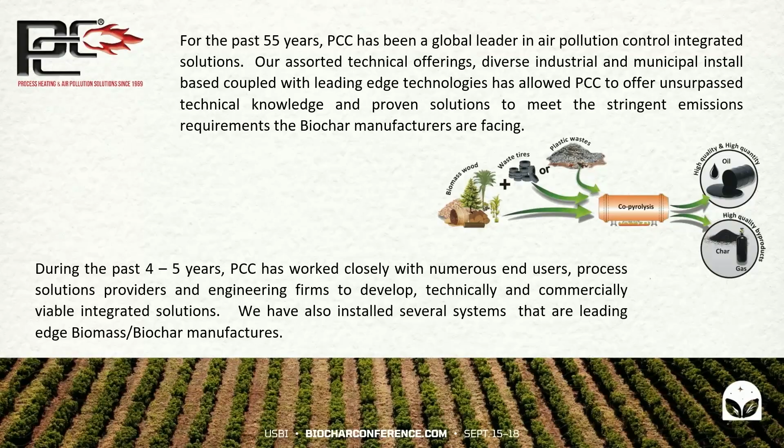From an equipment standpoint, when you look at the technologies PCC is able to offer, we can offer direct-fired thermal oxidizers and combustors, so we're generating heat sources while combusting those pollutants. We have recuperative thermal oxidizers, regenerative thermal oxidizers, and all types of scrubber technology, wet and dry, to treat acid gas formation or other compounds that may be within the waste gas or gas evolved from that pyrolysis process.

Particulate control, as you're going to see in this presentation, particulate is the number one compound that needs to be treated throughout the entire biochar manufacturing process. So we can look at bag houses, venturis, and if we get into submicron, very fine particulate, we would look at wet electrostatic precipitators.

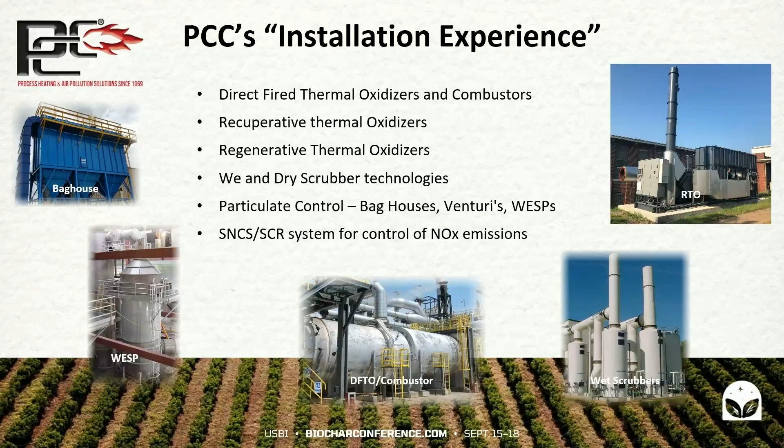The other thing we really see today, very dominant throughout all industry, you can look at VOCs, volatile organic compounds, those carbon-based compounds emitted from various productions. But NOx, nitrous oxide, is really at almost a higher level from a control standpoint these days. The limits keep going down, the allowable emissions continue to decrease, and depending on where you are in the country it can be very significant. So we need to look at NOx, and the alternative technologies available to reduce those post-combustion NOx emissions. We'll be talking a little bit about that as well.

So we all know, you're here participating in this conference, we know the benefits of biochar, the basic reactions and the basic technology behind pyrolysis. But I'm not sure everybody is fully aware of what happens during that pyrolysis process at high temperatures, low oxygen content. Depending on the feedstock materials, you're going to generate various volatile organic compounds, VOCs, NOx, CO, CO2. There's all kinds of things coming out of that process.

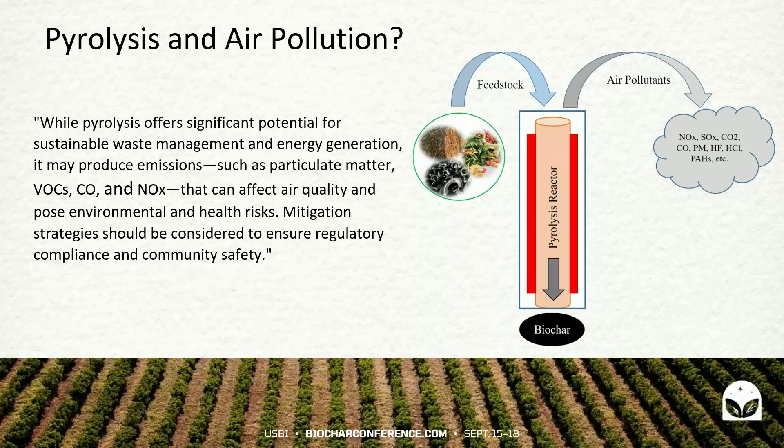And it's our job to treat those compounds so that you are in compliance and so that we're not polluting the air. It's one thing to take a waste product and generate something very valuable, that has a tremendous amount of value to the market, the agricultural market, and various industries for a multitude of applications, but we can't pollute the environment. The biochar industry is just like any other industry: at certain levels, certain emission rates, you're going to have to put controls in place.

Depending on the feedstock will determine basically what type of emissions and the volume of emissions you're going to be generating, and we'll go through that in more detail. The key message is that throughout the process, you're emitting different things, from particulate matter to VOCs. In certain cases, you'll be generating NOx, CO, CO2. So there are waste products that need to be dealt with. Once again, this is all predicated on where you are from a manufacturing standpoint, and what tons per year you're emitting.

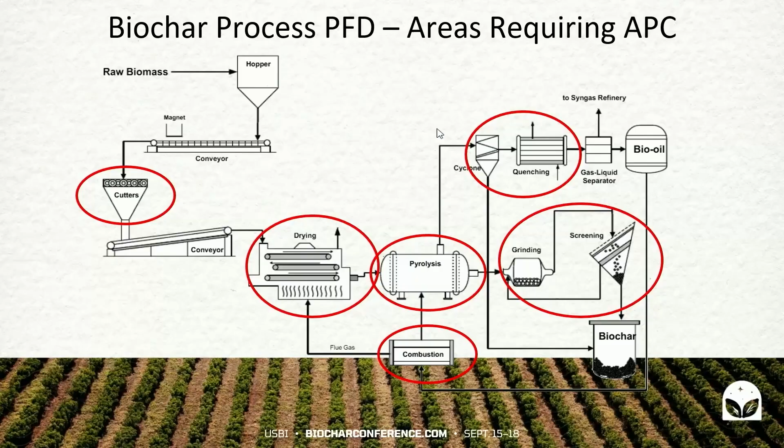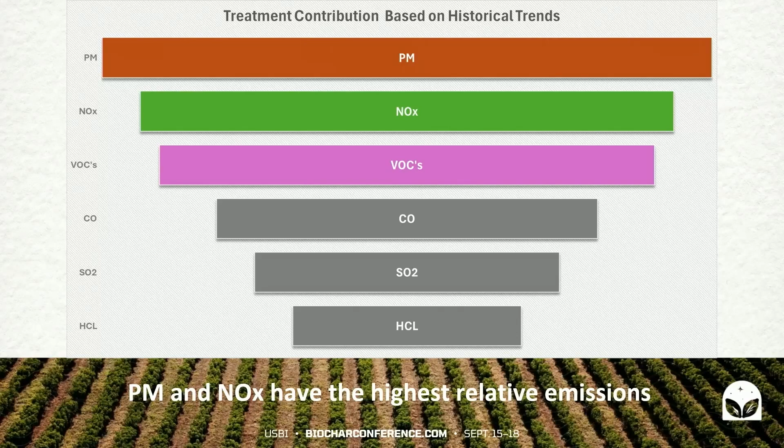Then we get into your VOCs - all the other types of compounds being emitted during the pyrolysis process. CO, SO2, and in some cases we're going to have acid gas formation, and it can vary. Hydrochloric is very common, depending on what compounds make up that biomass or the product going into the system. You could create some acid gas, and those have to be treated. You can't emit hydrochloric acid to the atmosphere - you need to treat that.

So when we look at an overview of the major emissions, we talked about particulate matter. Well, particulate matter can come in all sizes. There are a lot of new regulations out there taking it down to PM 2.5, the very fine particulate, even submicron particulate. And the destruction efficiencies are extremely high, so the requirements are very high. You have to look at that.

And particulate matter can create respiratory problems for people. You can see it in the air, you can see smoke. Smoke typically has a lot of particulate in it.

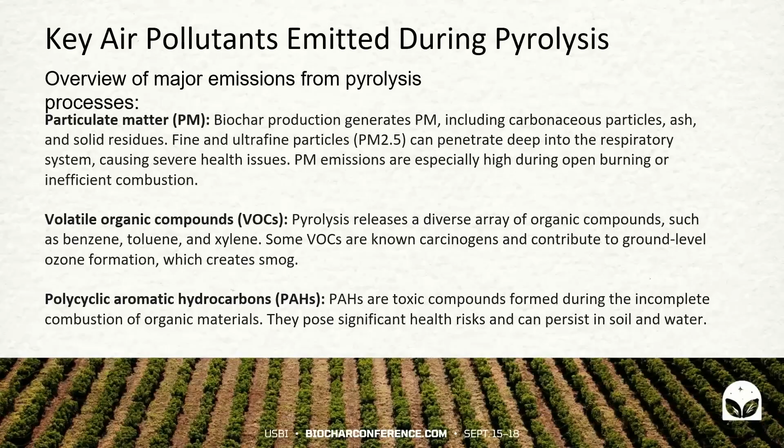Volatile organic compounds - there's all types of compounds that will be released during the pyrolysis process. You can have compounds such as benzenes, toluenes, xylenes, a lot of different carbon-bearing products. There's also PAHs, carbon monoxide, and NOx, which is critical. And then we've got the HAPs compounds we have to deal with.

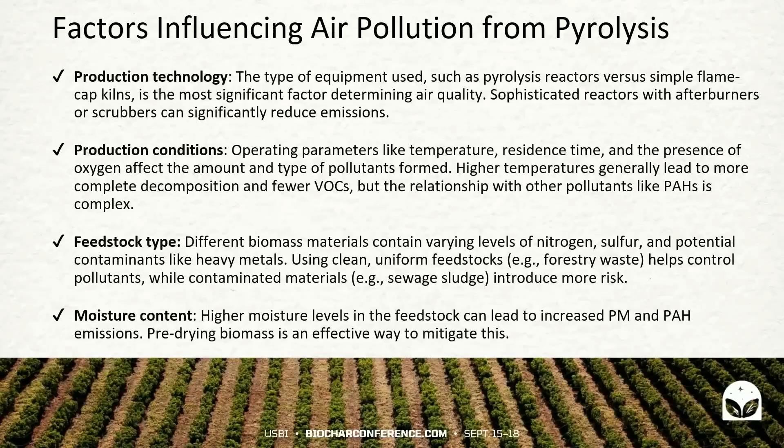So how do we influence this? We can look at the type of equipment being used for the pyrolysis process, the production conditions - temperature, length of time, oxygen content - and the feedstock type, which is very critical. What type of feedstock are we using for this? Moisture content within the process - we need to look very closely at that as well.

Feedstocks - all types of feedstocks. You guys, I don't need to tell you what they are.

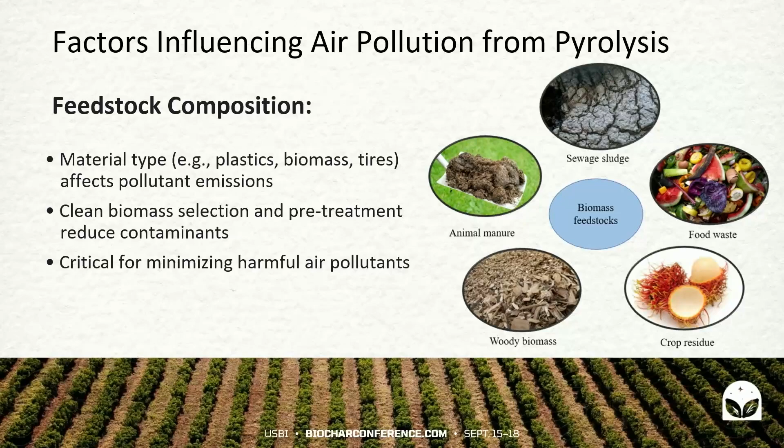You're all aware of it. There are certain feedstocks that produce less VOCs than others. Typically, when you get into biomass and agricultural byproducts, those are very low emitters for the most part. They all emit, but very low. When you get into plastics or municipal waste, you're going to have all kinds of compounds coming out of those. Municipal waste is probably the worst because you have no idea what's in there, and it varies from municipality to municipality.

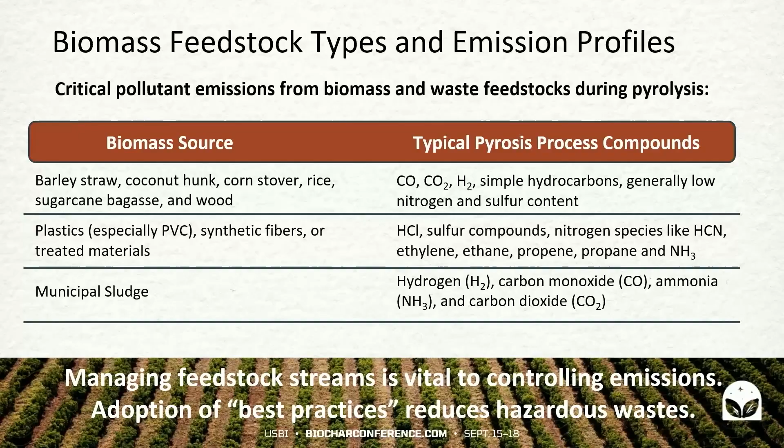So if we look at different feed sources, more or less that biomass, your barley, your straw, agricultural byproducts, you can see what's emitted. Various compounds are there, but when you get into your plastics and municipal sludge, suddenly you're dealing with higher concentrations. You have the potential to create acid gas, and you also create a lot of NOx. This adds to your control requirements.

Typically, if we're dealing with particulate matter, we're going to institute baghouses, cyclones, venturis, or if we're into submicron, we're going to go with WESPs. You could have a combination thereof in some cases. For controlling diverse pollutants, we can do dry sorbent scrubbers, wet scrubbers, carbon injection systems, and control ammonia slips—so there's a lot of different things we can look at.

NOx emissions, once again, are critical, and really it comes down to how effective you run your process from a control standpoint, and what you're doing in your process to minimize that. Temperature is a big thing—the higher you go in temperature, the more NOx you will generate if you have nitrogen-bearing compounds, so we need to look very closely at that.

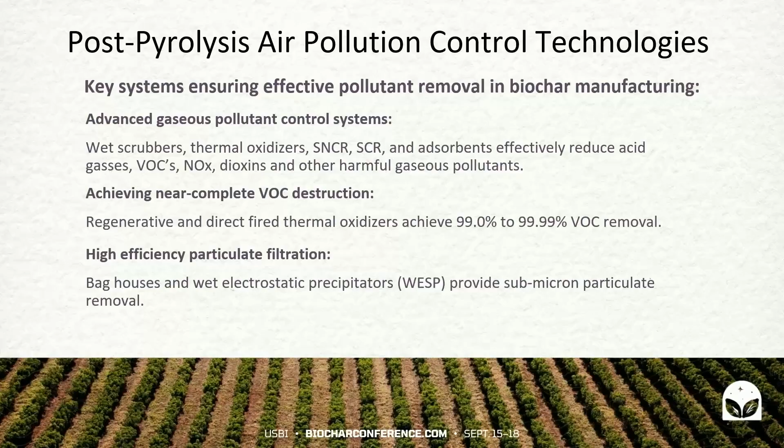When you get into advanced gaseous pollutants and typical VOCs, you start to look at wet scrubber technologies, more advanced thermal oxidizers. At the end of the day, the combustion technology, in the simplest of terms, is a flame in a can that operates at a given temperature for a given amount of time, typically in the 1 second range at 1650, 1700, 1800 degrees F, yielding very, very high destruction efficiencies. And then for very small submicron particulate, we look at wet electrostatic precipitator systems.

VOCs—we can achieve 99 to 99.99% destruction via combustion technologies. There are various technologies and configurations out there, but you can achieve very high destruction. Carbon monoxide, we can get down to the 50 part per million range. Sulfur compounds, 98 to 99% destruction. Nitrogen oxides, or NOx, we can get down to 80 to 95% removal.

Two methods: if we use an SNCR, a selective non-catalytic reduction, we can achieve about 60% reduction. If we use the SCR, the selective catalytic reduction, we can take that down to the 95% range. And then when you look at other pollutants, down the list, we can achieve very, very high destruction efficiencies. So as I indicated before, we're really able to provide the technology to meet the emission requirements pretty much wherever you are. And like I said, we're very successful—we've got two installations in California that are meeting all the NOx requirements.

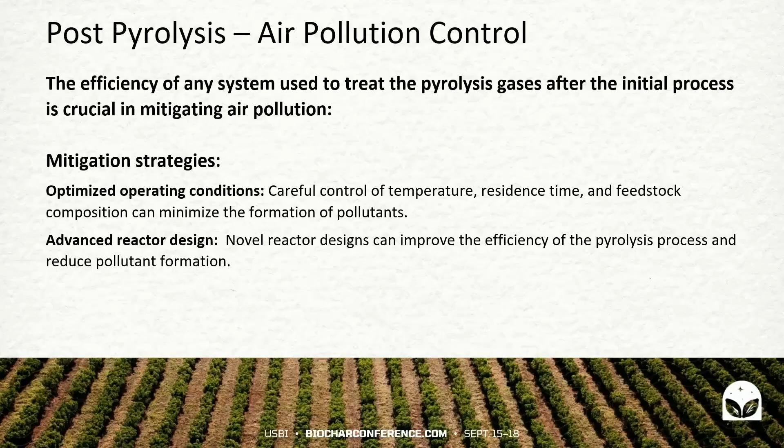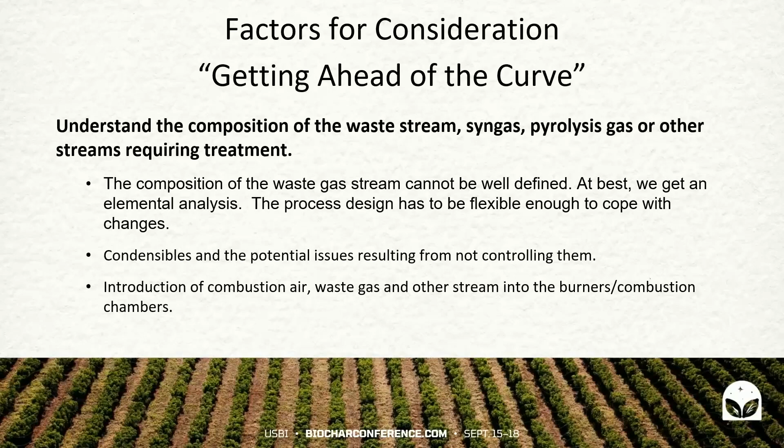You need to understand what the composition of that waste gas coming out of that system is. The more information you can provide to the air pollution control supplier, the more efficient, effective, and cost effective that system's going to be. Air pollution control equipment is not cheap, and it's an expense. So you want to make sure it's designed to meet the permit, and designed to perform day in and day out very efficiently.

So when you look at getting ahead of the curve here, you want to look at your materials of construction. How do you handle varying levels of process change? You need certain levels of flexibility because your process is not going to be the same every day. So you need to understand that when we design the equipment, design a system that meets all those requirements that are out there.

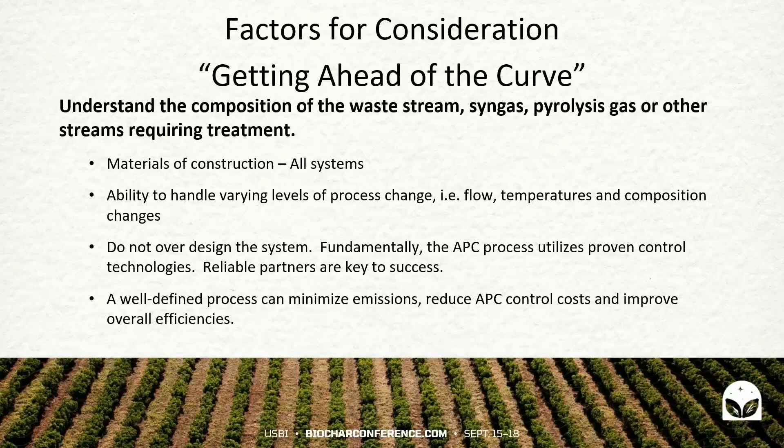The other thing we're seeing a lot of these days, and it really makes a lot of sense, is if you can take that heat that is being generated after you come out of the air pollution control and convert that to power. There are a lot of ways of doing that. You can do that with steam turbines, you can do that with ORCs, organic Rankine systems. These all allow you the ability to generate power, and you get a return on that investment. So that power can go to the grid.

We have companies we're working with right now that do biocoal. They produce biocoal in California for the steel industry. And they're actually now going to use the off gas and generate power to power the entire plant. They want to get off the grid. They don't want to pay the high prices. And the other thing we need to think about: today it may not be totally 100% justifiable because electricity is still relatively cheap.

We're seeing a lot of the data centers that are coming in. These things require massive amounts of power. And the price of electricity in the next 3 years is going to go up. Whether we like it or not, from an industrial standpoint or a residential standpoint, we're going to be paying more for electricity. So the return on investment is much, much quicker than what it would be today. So you can start to look at this and do a financial analysis and justify it.

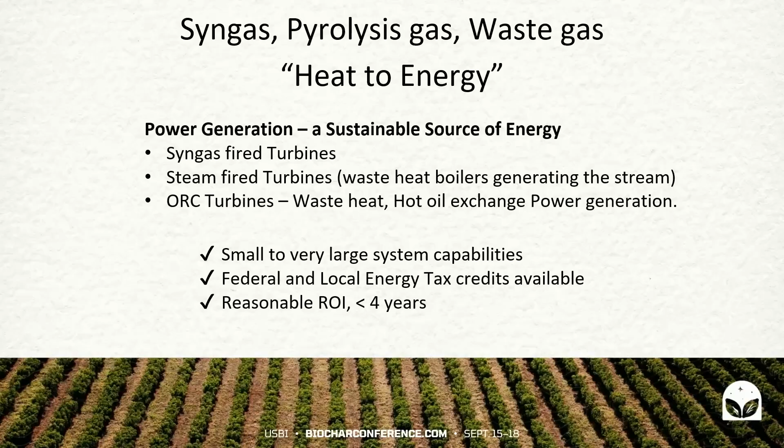So I guess in summary, my last slide here, and I think I'm almost on time - there's a lot that can be done. This is a great technology. This is a great new industry. And it's been around a while, but it's growing.

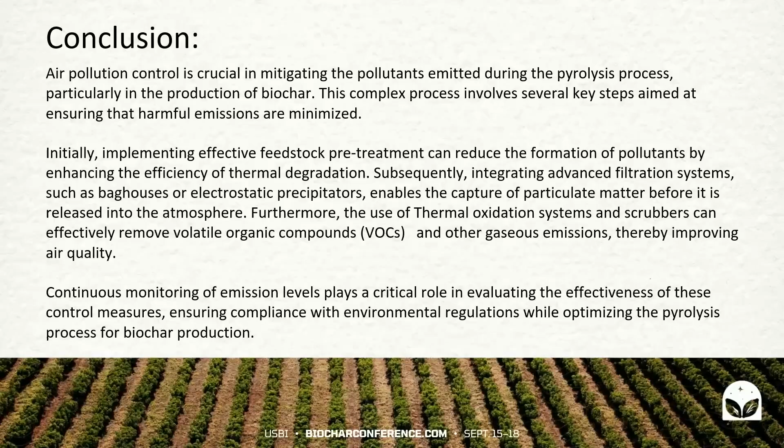But you need to be cognizant of it. You need to be aware of it. It's not something anybody really wants to deal with, but you're going to have to do it if you're at a certain size. And I think even if you're small, you're going to want to grow, and as you grow, you're going to hit that level where you're going to be required to permit. And it's nice to know what technologies are available, what options you have, and what can be yielded - the guarantees that you're going to get.

So that was kind of a quick overview, a very high-level overview of the technologies. But I guess, in conclusion, the technologies exist. We can hit the permit requirements. There's a lot of flexibility in the different types of technologies that can be selected. So we work very closely - all the systems we do, probably 98% of everything that we do, are custom designed. They're designed to meet the specifications that the end user is requiring.

So with that, I'll open it up to questions. Yep, 5 minutes for questions. Yes, sir. Michael, great presentation.

For dioxins and furans, imagine we bring some plastics in and some other stuff. What do you guys recommend? Our standard technology will treat those.

Let's go back to that chart. Those were listed. When you get into the other pollutants, dioxins, furans, we can achieve 99% removal. It's going to be based on what those compounds are and how we design the system. There are multiple ways we can design these systems. If we're dealing with high NOx, as an example, we could put a multi-stage system in where we're breaking those nitrogen-bearing compounds down, and we're not treating them with a lot of oxygen. So we would do the same thing when you start to look at dioxins and furans. It all comes down to how we design that system.

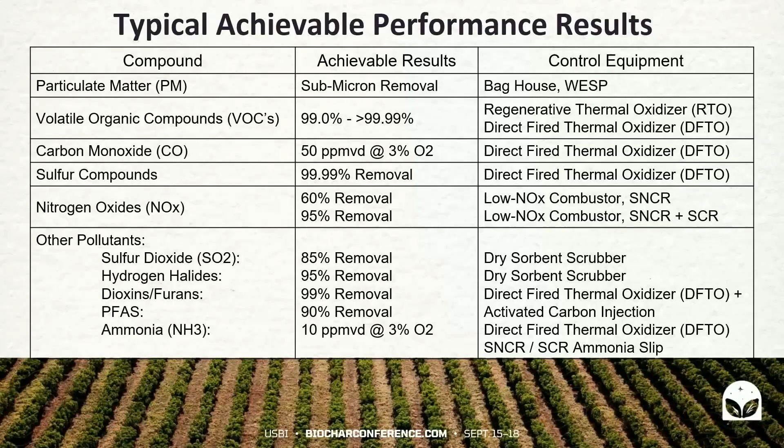If you pull the power out of it, that percentage is going to come down. So it's not overly expensive, but it's all tied to volume. It has to do with how much waste gas we're pushing through there. More than anything else, it's volume. So the bigger the pyrolysis reactor, the more waste you have going through, the bigger the system has to be.